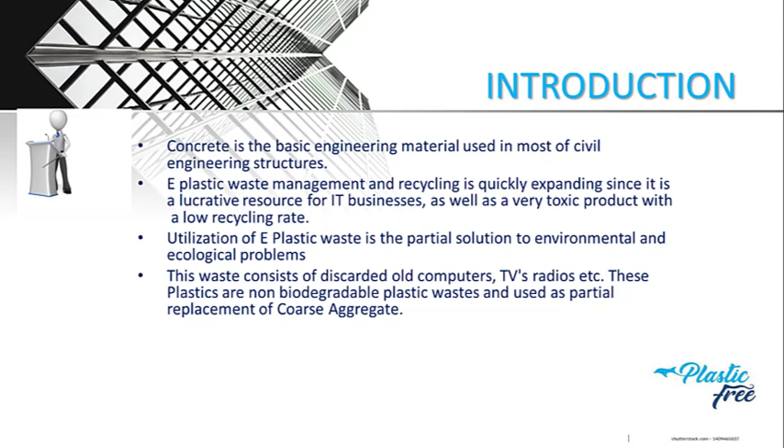E-plastic waste management and recycling is quickly expanding since it is a lucrative resource for IT businesses, as well as a very toxic product with a low recycling rate. Utilization of e-plastic waste is the partial solution to environmental and ecological problems. This waste consists of discarded old computers, TVs, radios, etc. These plastics are non-biodegradable plastic wastes and used as partial replacement of coarse aggregate.

The real problem that this project will be dealing with is that traditional concrete production heavily relies on the extraction of natural coarse aggregate, leading to environmental degradation and depletion of finite resources. Moreover, the improper disposal of plastic waste poses a significant challenge to sustainable waste management. Therefore, there is a critical need to explore alternative solutions that address both the environmental impact of coarse aggregate extraction and the management of plastic waste.

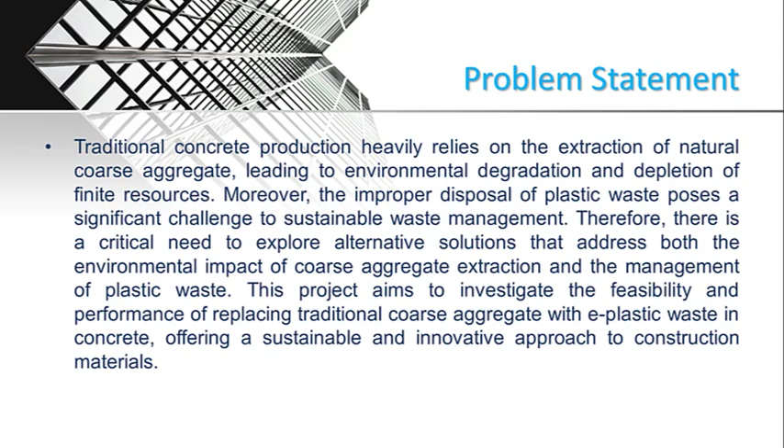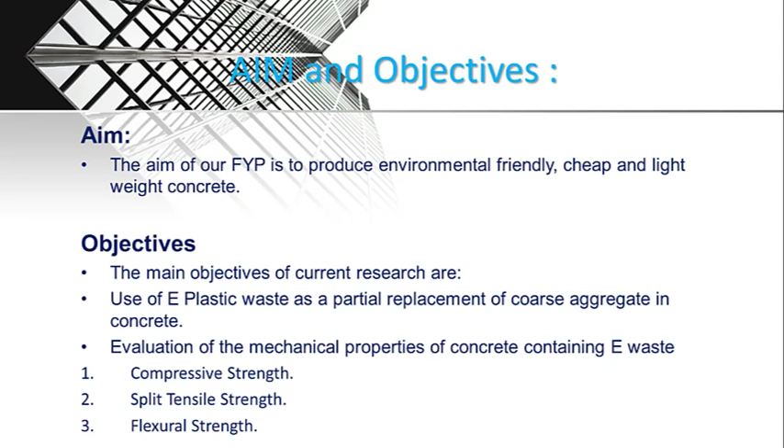This project aims to investigate the feasibility and performance of replacing traditional coarse aggregate with e-plastic waste in concrete, offering a sustainable and innovative approach to construction materials. Aims and objectives. Aim: the prime aim of this project is to produce environment-friendly, cheap, and lightweight concrete. Objective: the main objectives of current research are use of e-plastic waste as a partial replacement of coarse aggregate in concrete, and evaluation of the mechanical properties of concrete containing e-waste, which are compressive strength, split tensile strength, and flexural strength.

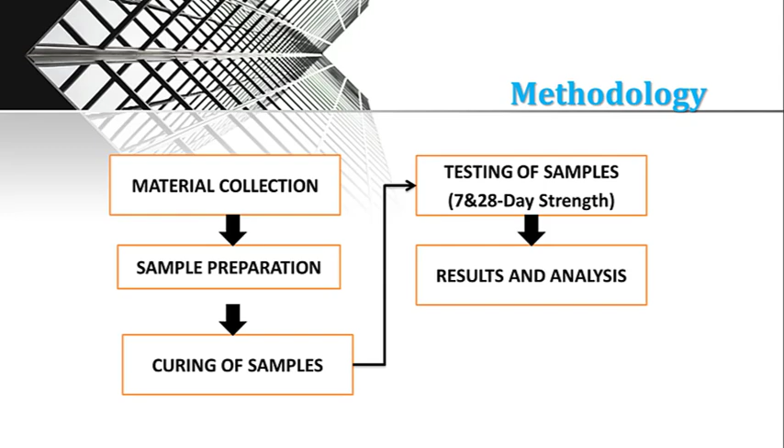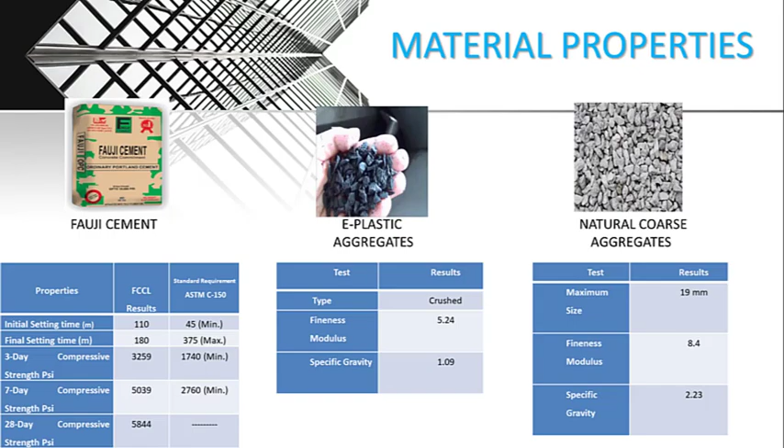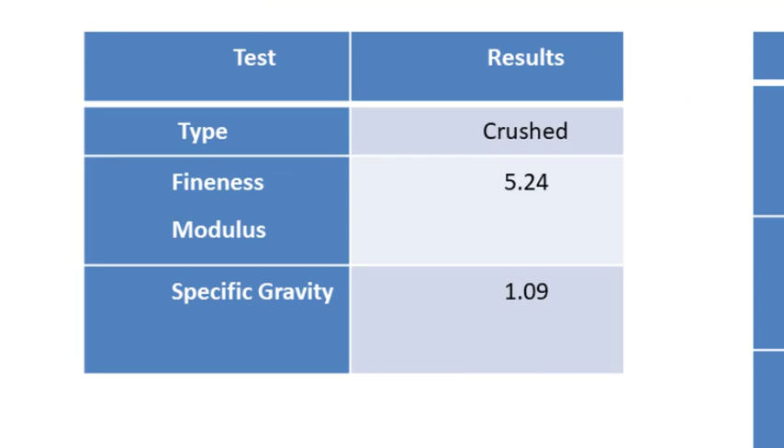The methodology of the project is carried out in following steps: material collection, sample preparation, curing of sample, testing of sample, result and analysis. Materials to be used in this project are Fauji cement, sand, e-plastic waste, natural coarse aggregate, and water. Now talking about the properties of material being used. Let's start with Fauji cement. Following are the properties of Fauji cement. Following are the properties of e-plastic. Following are the properties of natural coarse aggregate.

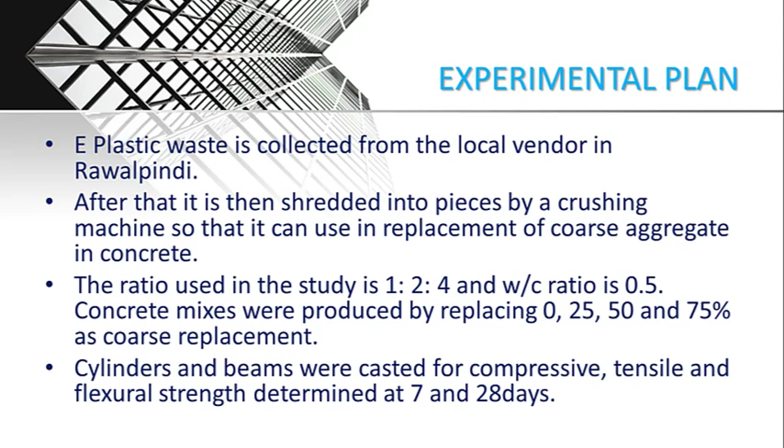The experimental plan is: e-plastic waste is collected from the local vendor in Rawalpindi. After that, it is shredded into pieces by a crushing machine so that it can be used in replacement of coarse aggregate in concrete. The ratio used in the study is 1:2:4 and water cement ratio is 0.5. Concrete mixes were produced by replacing 0, 25, 50 and 75% as coarse replacement. Cylinders and beams were casted for compressive, tensile and flexural strength determined at 7 and 28 days.

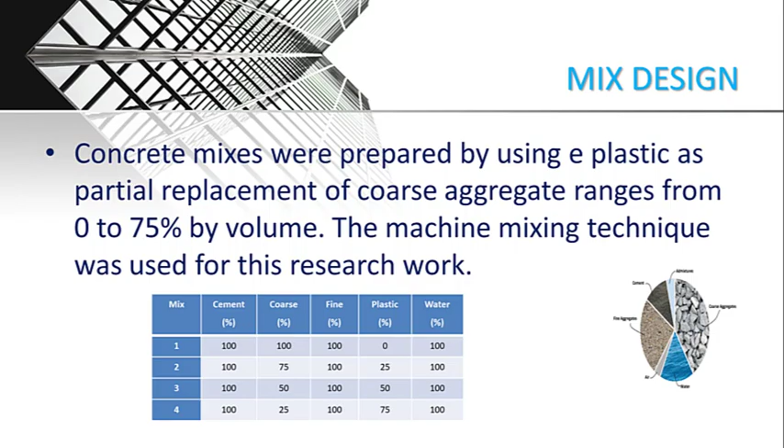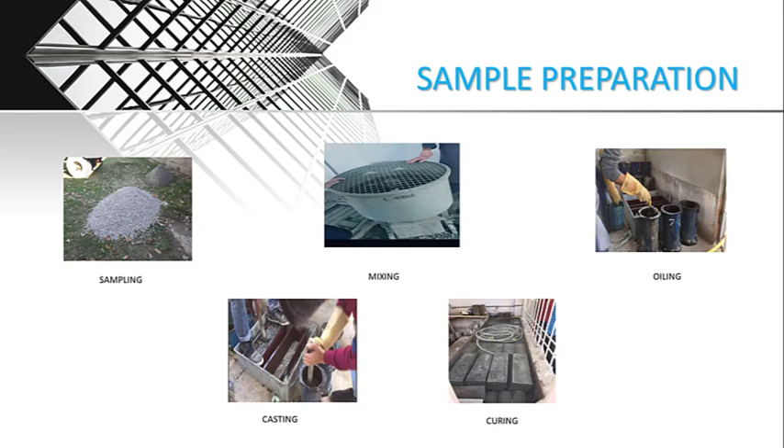Mix design. Concrete mixes were prepared by using e-plastic as partial replacement of coarse aggregate ranging from 0 to 75% by volume. Following table shows the mix design by volume percentage. The sample preparation was carried out in following steps: sampling, mixing, oiling, casting, curing.